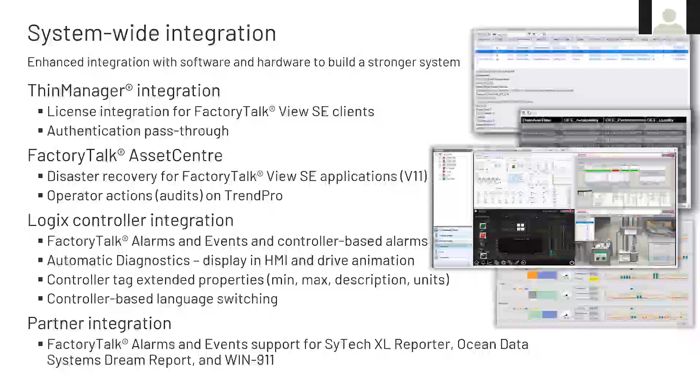Pre-built options for items such as alarm objects and process objects help contribute to the idea of no code or low code, where an individual without hugely extensive knowledge or experience with the system can start developing quickly with pre-built templates. The pre-built alarm objects can pretty much slap into the HMI with no configuration up front, but there is customizability for all the various columns, colors, filters, etc.

You'll likely start seeing no code or low code popping up more often in the Rockwell presentations. The idea is to really, like I said, allow someone without a huge, extensive knowledge to get up to speed more quickly and be able to assist and help out in the fastest possible time.

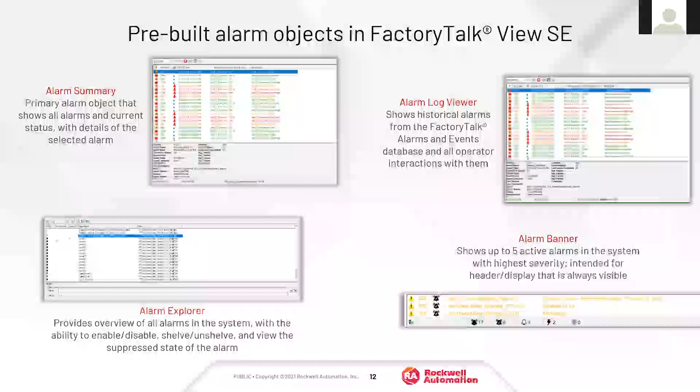Even more information is now available within TrendPro and is provided by alarms and events, allowing for greater context around an interested point in time. Providing operators with a full picture of what's happening in a plant can help speed up troubleshooting, response time, making an accurate response, and providing detailed information about what to look for the next time an event or series of events might be starting to occur, to get ahead of anything that might cause downtime

for something that's been seen before. Having clearly marked data can help with that efficiency and decision making for all personnel. And this is just one more way to add to that breadcrumb capability of finding out and determining what's actually going on in an environment.

Additional libraries have been added for newer catalog numbers like the 755T, the Stratix 5800, the L8 controllers with the 5580 ControlLogix, the 5380 CompactLogix, 5000, Flex 5000, all the new IO-Link devices, and much more that you see on this list here.

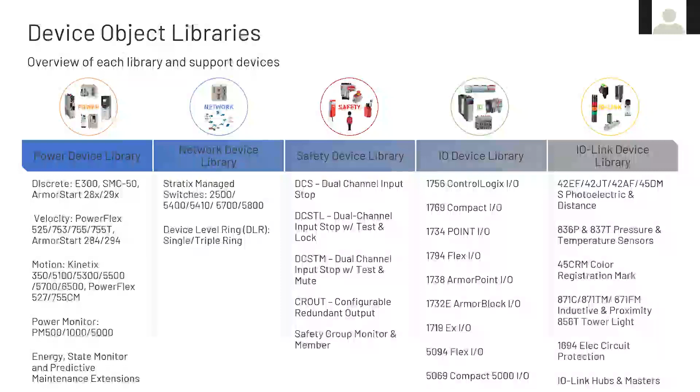These all help contribute to that low code or no code idea to assist in speeding up the development cycle, as well as having a more standardized approach for more than the single individual that's starting to develop the screens. They can get up to speed much faster, or if you have multiple people developing the screens, it's easier to understand, troubleshoot, and update a series of displays between multiple individuals because they're using the same design process and design libraries throughout.

And so some improvements on version 13. Excuse me, I'm going to take a sip real quick.

A version 13 expansion on a release capability introduced in version 12 is the ability to have bidirectional information with the use of PowerShell scripts. Previously it was only, I believe, one direction. Now you can go both directions, to and from the script to the HMI. You can introduce custom application code that can trigger on events, such as a tag value within FactoryTalk View SE, or within the FactoryTalk View SE server OS.

System events can trigger a script to delete, create, read, or write HMI tag values without needing the FactoryTalk View SE client. Previously with VBA, the code needed to rely on a single client to execute the code, while this implementation allows the coding interface to execute directly on the server instead, with PowerShell, with direct access to the HMI tags themselves. Other features of using a PowerShell script are the ability to send emails and update text files or logs.

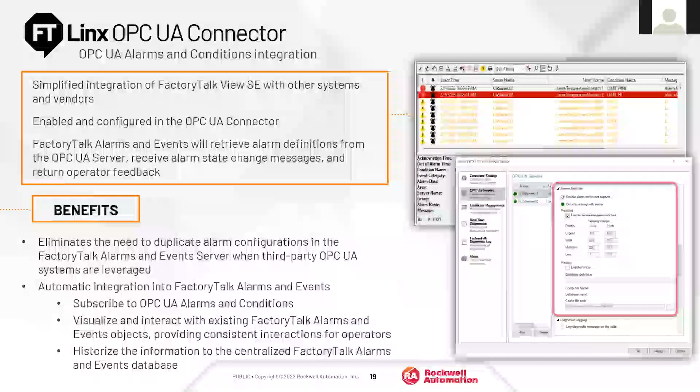The integration of FactoryTalk Linx has been simplified for use with FactoryTalk View SE and other third-party devices. OPC UA uses the publish-subscribe model, where a device only receives information that is needed and of interest to those subscribing to it. Another efficiency improvement: using the connector, you can eliminate the need to duplicate alarms across different environments that may be from two different vendors. So you're reducing the amount of overhead work and restricting the duplication necessary to make unlike environments talk together and work well.

The licensing for ThinManager is now integrated with FactoryTalk Activation Manager and its environment, for hosting, rehosting, and binding to the license server in the same manner you're used to with other software under the Rockwell umbrella. This isn't necessarily new, but if it's been a while since you've ordered ThinManager, you'll definitely notice it when you go to activate the software. You'll go to FactoryTalk Activation Manager instead of the older traditional ThinManager way.

ThinManager also now allows for authentication pass-through. In the past, users had to log in with ThinManager and other software applications separately, so you had to do multiple logins. But now a single user can log in once for multiple supported HMI products such as FactoryTalk View SE, thus streamlining the login process.

And the version 13 on this is actually ThinManager version 13. So you'll notice that Rockwell will start aligning, or is trying to align certain versions with one another. And this is one of those instances where ThinManager version 13 is starting to align with FactoryTalk View SE version 13. And ThinManager itself also now has an event-based content delivery to display relevant visualizations based on a trigger from another application or event.

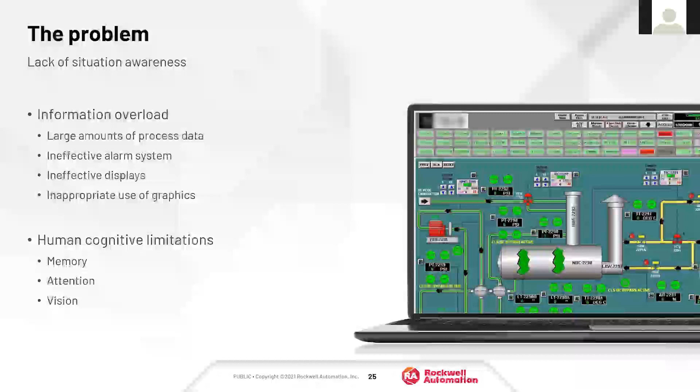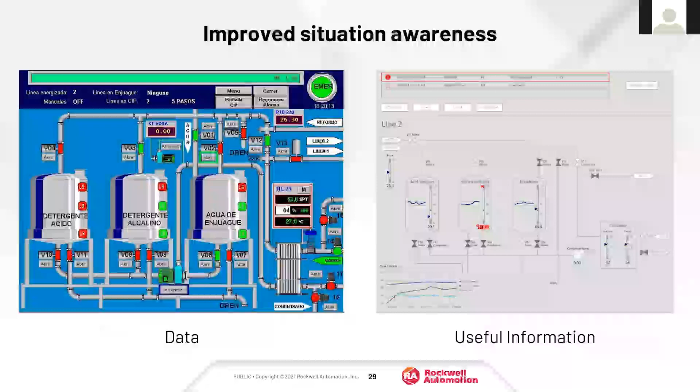So that's where we want to end up with situation awareness, is we want to be able to provide useful information on the screen and not make it so busy, so that even though the data is on the screen, it may not be as useful to us. So how do we do that?

So that's one piece. So the other piece is how do we organize an HMI system? Because we obviously have to have multiple screens. We have many screens. We're typically controlling complex processes or manufacturing facilities. So number one, we want to be able to provide a good overview to the operator of this entire system, with the ability to go down to a very granular level and troubleshoot. And all that needs to happen in one system. So how do we do that?

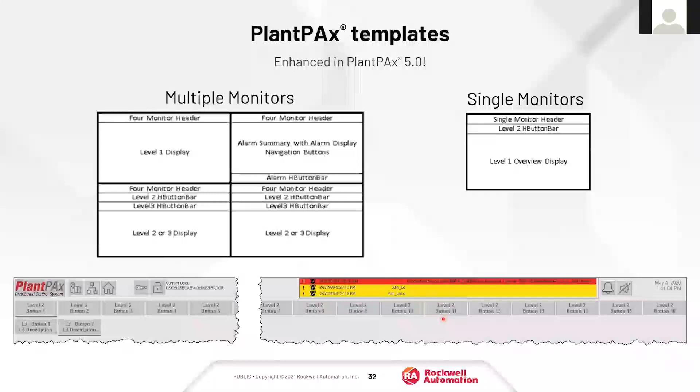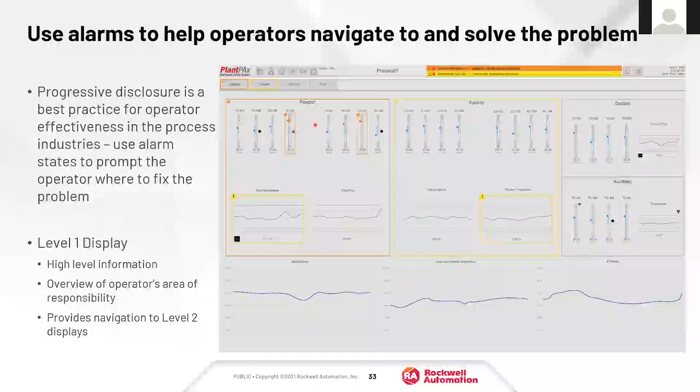And so I think that's kind of interesting that you see the trends and the bar charts on a level 1 display and not really the process equipment necessarily. So that's your overview screen. Now at a level 2 display, again, this is where the operator is going to spend the majority of his or her time in normal conditions. And so you see more details here.

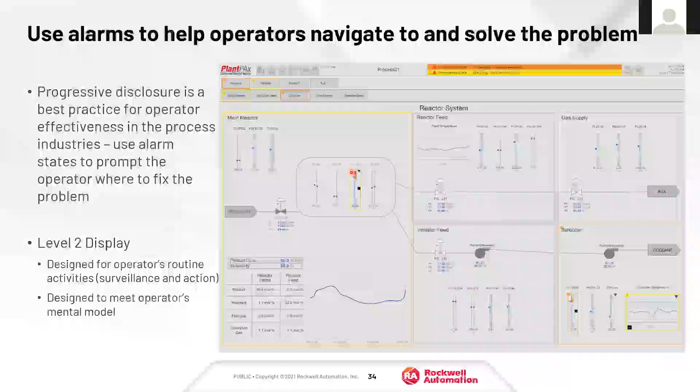But again, without having to look at an alarm screen, I know that my scrubber is orange over here, so I know I've got an issue here. And then I see some red up here, so I know I've got an issue here as well. So I know exactly where I need to go when I go to my level 3 display. So again, here's my main reactor. This is a level 3 display, and so I've got a lot more details.

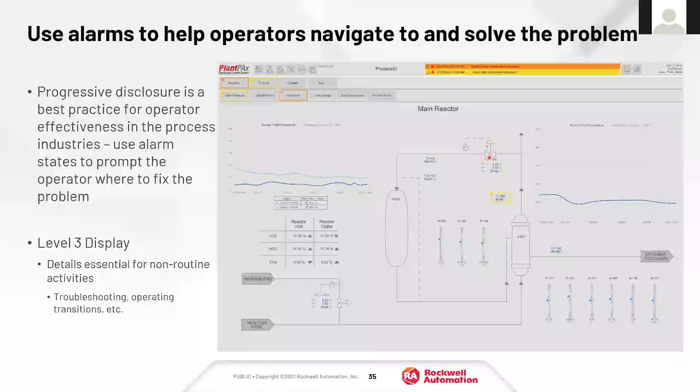Again, this would be my level 3 screen. And any deeper than this, then I'm going to start using my pop-ups. So I'm going to go into my temperature indicator here, or maybe my PID loop here for more information. So that kind of covers the general topic of situation awareness. And what I want to go into now is a little bit more detail on how Rockwell handles that with the HMI Graphic Framework.

And so again, we talk about PlantPAx here, but all these tools are available in non-PlantPAx systems. Rockwell released a couple of versions ago, I think it was version 11 of FactoryTalk View SE, an ISA 101 HMI style guide. Rockwell calls it the process HMI style guide, but it is used in very much detail to follow an ISA 101 high performance graphic guideline, with the purpose of improving situation awareness for the operator, making abnormal conditions easier to troubleshoot. That's really the whole purpose of this whole HMI initiative.

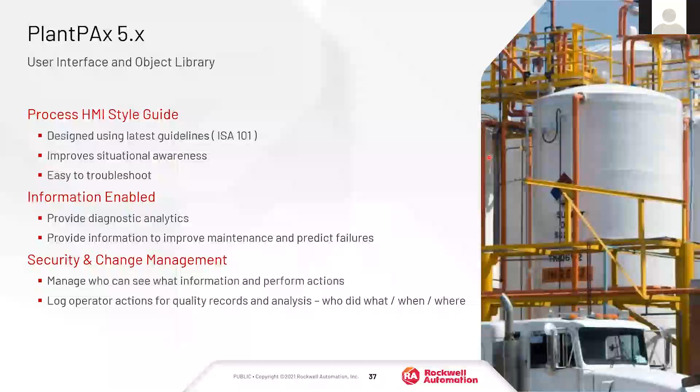So turning data into information, making more easily managed security and change management and operator actions, et cetera. So what's part of the graphic framework? Well, there's 4 main components. We've talked about level 1 through level 4 and how to organize the screens, but specifically with the HMI graphic framework, you get 4 main components. So you get a number of header graphics, whether that would be your multi-monitor header or your single monitor header we talked about earlier in the presentation. Those headers are pre-configured graphics that you can download from the download center and import into your HMI screen

to start using. There's a whole number of process control displays that also are available, and those displays you can use to develop your system. In addition to those displays, you've got a whole series of different library graphics that are available, and all the faceplates that are available. And then the header and footers have built-in navigation, built-in alarm indication. You have standard alarm screens Brian talked about earlier in the presentation. So this is all encompassing of the graphic framework that's available for you to use as templates.

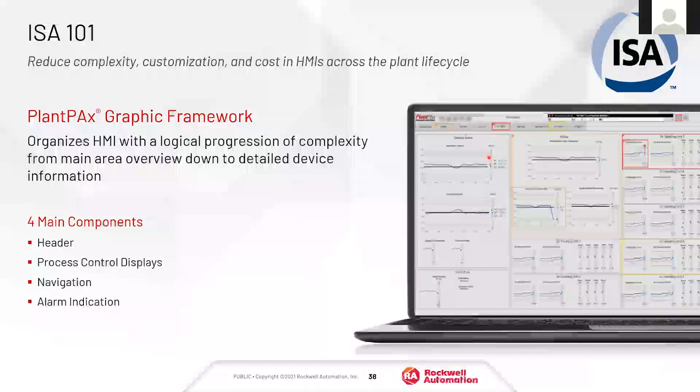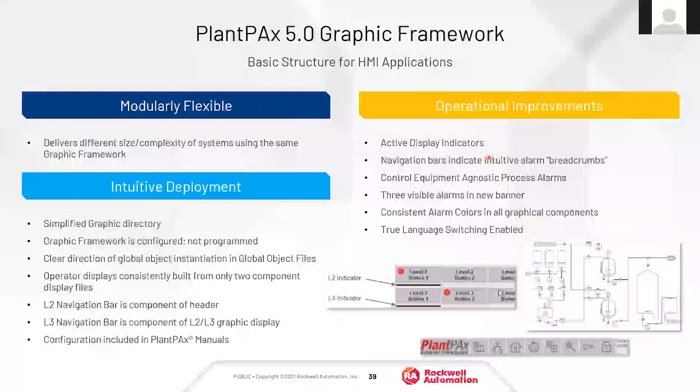So some more information about the graphic framework. Like I said, it's very flexible. It's standards based. So you have your full level 2 button bar, level 3 button bar. You have your header bar, flexible but standard. So you can take the PlantPAx graphics screen off and put the end user logo on the top left, and it becomes more intuitive in deploying.

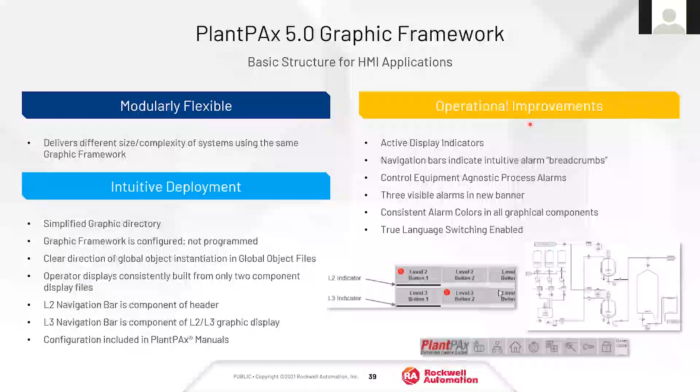So you're dragging and dropping, you're configuring pre-drawn graphics, etc. And that in turn should handle the standardization and ease of use of navigation of the system using this framework. That's the whole idea behind this framework.

And so this is a little more detailed screen of what this may look like. So again, you've got your site overview on top, and you may have a pop-up site overview that might jump to different level 1 screens on here. But then you have your level 1 with level 2 buttons access.

So in navigation, you typically go from level to level. So you don't go from level 1 all the way down to level 4 faceplates. So you start at level 1 as your overview, and then you have level 2 displays that are open. And then for normal operation, you're going to stay in level 2. But then for abnormals or for troubleshooting, you're going to jump down to level 3 and level 4.

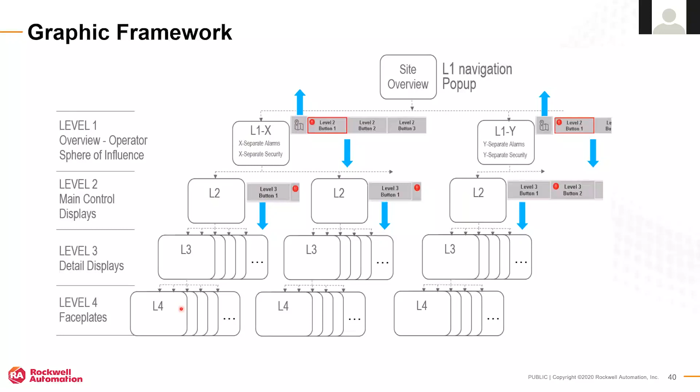That's typically how the HMI is going to be built, and how the framework would look, much like this diagram here. And again, this is sort of to review, but this is another example of what the different graphics look like. So again, your level 1 overview, lots of bar graphs and trends is really pretty much what you're going to see in level 1. And then the breadcrumb alarms, basically highlighting the red, yellow, orange, what have you, of different priority abnormalities to chase down.

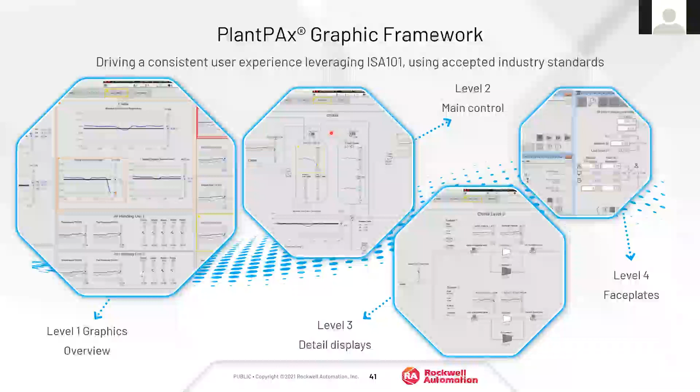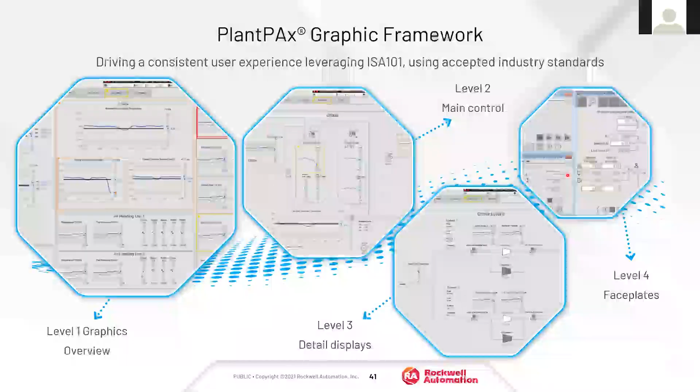And then level 2, you have your main control, and this level 2 does have some graphics tied to it. It looks like maybe a couple of reactors or separators there. So that's your normal operation. And then you come down here to get to your detailed displays and your faceplates. So that's pretty much what covers the presentation.

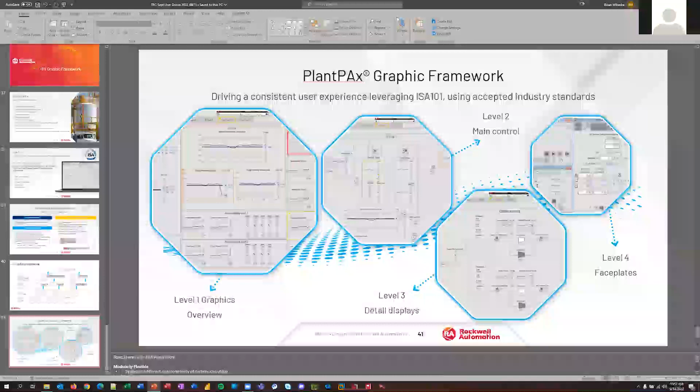Now, what I'd like to do is go ahead and share my screen, and I'm going to go over this style guide document. And Brian, can you see my screen? Yeah. Sorry, I was double muted. Yeah, that's okay. I'll take that as a yes.

So this is a really helpful guide. It's about 56 pages long. It's available for download on Rockwell's literature site. Search for process HMI style guide, or you can just Google FactoryTalk View HMI style guide, and Google will find it. And we can put a link to this white paper on the presentation.

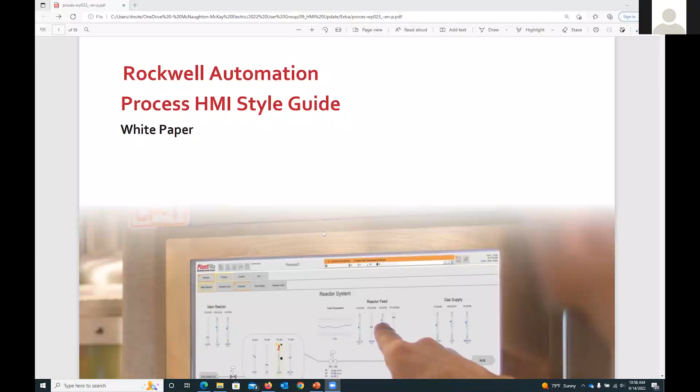But this is really a helpful guide to step you through how to implement all these tools, all these templates that Rockwell has available. So I just want to take the time to go over a couple of things in this document, just to give you a taste of what this looks like. So remember, in the presentation, I had a couple of these layouts. And so this would be a standard HMI template. Our presentation today pulled straight out of this document what a layout would look like, whether you have a single monitor, a multi-monitor, or 4-monitor system.

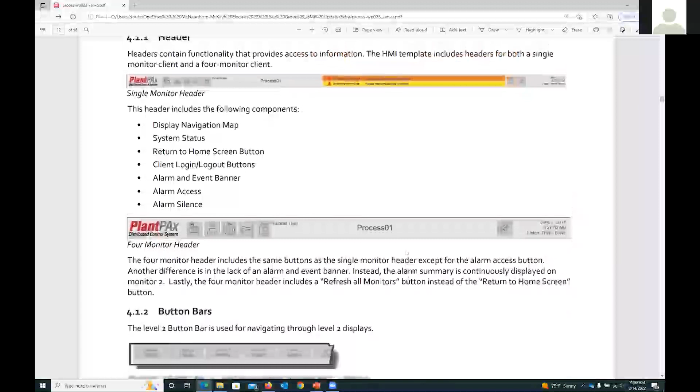So it's scrolling through here. What I wanted to show you as well are the 2 headers. These headers are part of the library objects that you download from Rockwell's download center, so just drag them straight into your View SE display, and then use them and customize them as you wish. But these are all standard. So the standard headers, here are the standard button bars. You've got level 2 and level 3 button bars that are also standard displays that you grab in.

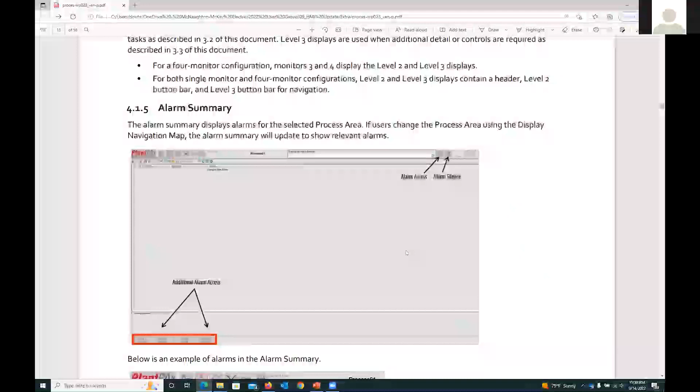And then here's an alarm summary. So this is a standard screen display that's also available, the standard alarm summary display, and that's just an example showing you what the alarms look like in the display. And this white paper walks you through how to implement those.

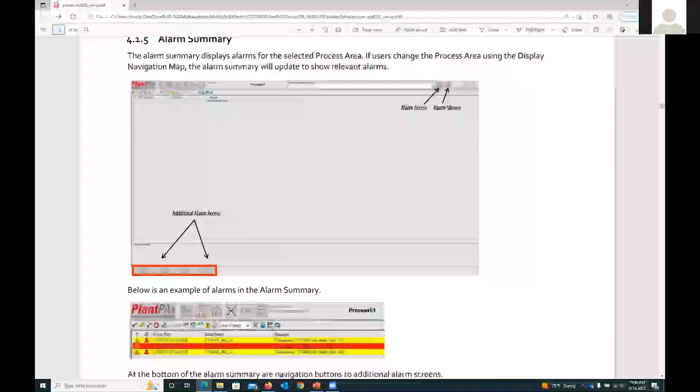A couple other things I want to show you. So some of the dynamic process objects. Rockwell in the library standardizes the colors and the view that you see based on the state of the object.

So we'll look at valves and motors here. So a valve control: a valve can be open and closed, but can also be closing and opening. Or you could have a stopped too if you had a solenoid valve or something. But these kind of in-between steps are sometimes as important if you're trying to diagnose an abnormal condition as the general state. And so these standard objects, different colors and graphically, will give you this information of where the state is of the particular device.

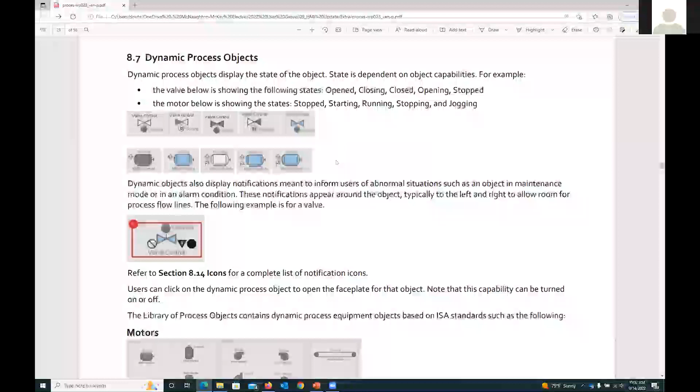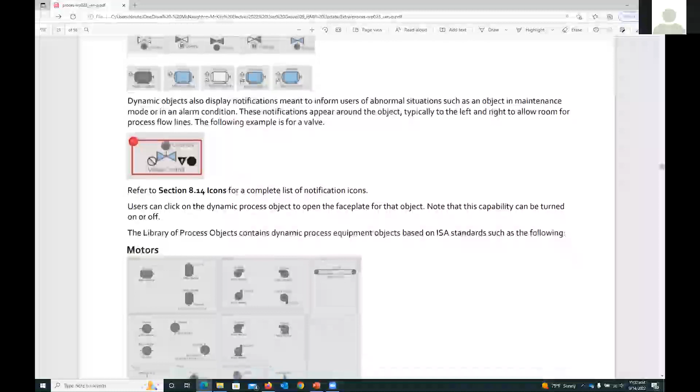And again, like a motor could be stopped, it could be running, but it also could be starting, stopping, or jogging. So if an operator is out there jogging a motor in the field, then it's important for the board operator to understand that. And of course, abnormal conditions. So if a device is in an abnormal condition, it'll be rectangled with an alarm around it, so you can follow that down. And this is an example of all the different motors you can just drag and drop onto your screen. You can group motors together, depending on how your process is working. So that's your dynamic process objects.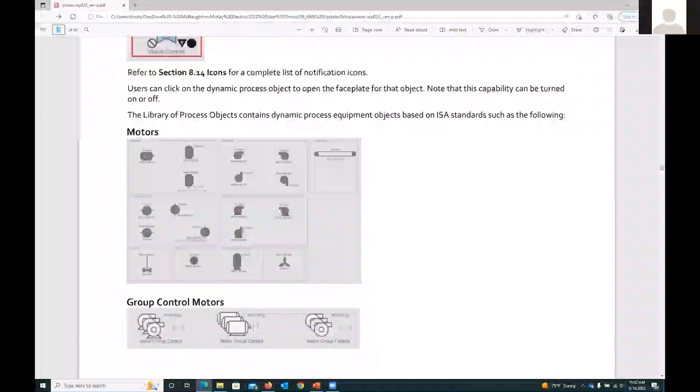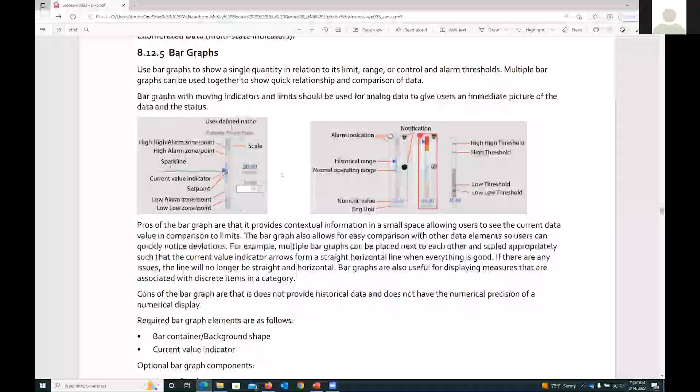A couple more things to show you. So a little bit about the bar graphs. This is some more detail of what's in the bar graph. There's a lot of information on the standard bar graphs. So not only do you see your current value, but you can see the scale. You can also see the alarm points, the alarm zones. You see the user-defined name as well. And then if there is an alarm condition indication, you'll see that covering that particular bar graph. So there's a lot of built-in value here on using these standard objects, and how they follow the ISA 101 standard is pretty interesting. So a couple more.

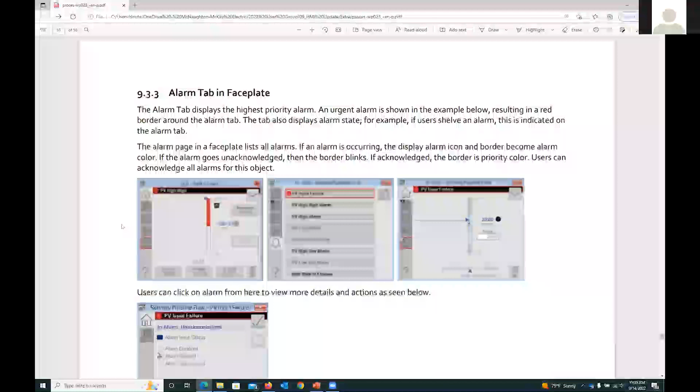And then finally, I did want to show the alarm tab in the faceplate. So if you're down into level 4 troubleshooting, all of Rockwell's level 4 library objects have an alarm tab. So you can get to the alarm information directly while you're troubleshooting the device and not have to jump back to an alarm summary screen or a dedicated alarm screen. So that's important, especially if you've got a single operator monitor and you don't want to jump in between an alarm summary screen and a troubleshooting level 4 faceplate. So this just gives you some example of what that looks like.

And I think that kind of covers it as far as situation awareness and ISA 101. And again, I would highly recommend if you're looking at implementing a FactoryTalk View system, take a look at this process HMI style guide, because it is very helpful in helping you develop View SE screen applications that support high performance graphics.

So I did notice there was a Q&A. I see the question, can you explain OPC UA publish and subscribe again? The OPC Unified Architecture has built-in security inside of it, and so in order for communications to happen, the producer or the originator of the data has to publish it, and then someone that wants to grab the data has to subscribe to it. And so that's an interlinking communication, kind of like a signature that has to happen. But I don't really have the details on that. That might be something we would get back to you on with more information, unless you guys have anything to add to that.